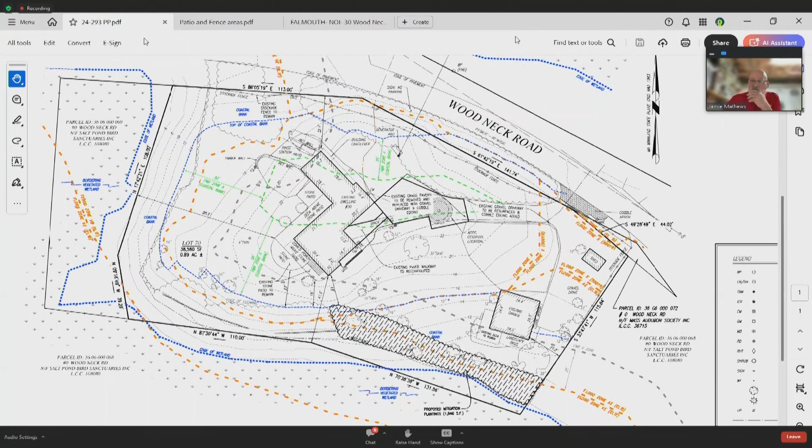I believe I've touched on all of staff's concerns, and hopefully we've addressed your concerns. So I'll stop sharing and address any questions you might have. Thanks, Tim. Sarah, do you have anything you'd like to add at this point?

Sorry, no, I'm fine to answer questions. I think Tim's comprehensive review shows how we'd like to resolve it. We did file this voluntarily in response to the enforcement order. The bulk of these were done just under 10 years ago, and we realize we need to address them, and hopefully the mitigation we're providing, which meets current regulations, will satisfy the board.

All right, thank you. Jim? Yes, Mr. Chairman. Tim, the portion of the fence in the V zone, that 49 linear feet, is that FEMA V zone or Falmouth V zone or both? That's FEMA V zone. What about our 25-foot offset? It would be approximately an additional 25 feet.

So, 74 linear feet, and the reason why I was kind of counting the 49 feet is because that's where the gate post is. So ideally, if we had to remove something, we'd like to remove it from that fence post to the gate down, because that's the actual portion of the stockade fence that's within the FEMA V zone.

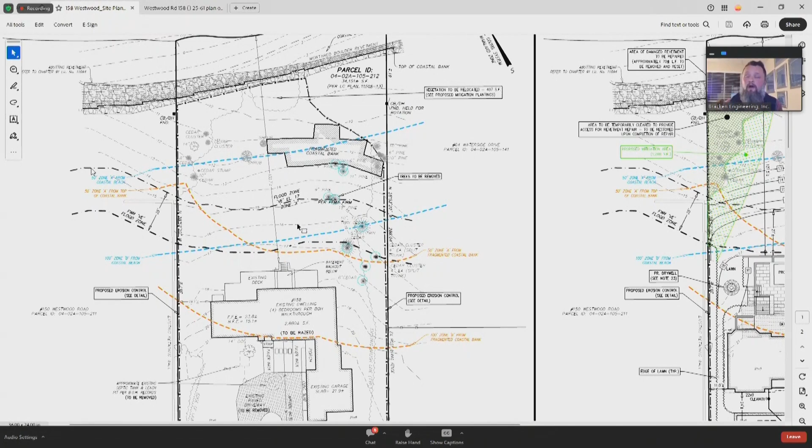Our project site is 158 Westwood Road, an existing developed single-family house lot created in 1961. There's an existing seawall on the northerly side of the property, approved through the Falmouth Commission back in 1976; it's a current mortared wall. Other resource areas on and near the lot are a coastal beach to the north, land subject to coastal storm flowage, and a VE flood zone, elevation 17, with the associated Falmouth 25-foot offset. The existing lot sits predominantly on the high side, around elevation 21 down to elevation 17.

The applicants are the new homeowners of the lot. They purchased this property over the summer and retained our office to work with them and the design team to redesign a new coastal resilient property. Initially they were looking to design a structure very similar to the house next door, more seaward on the property, with a seawall or retaining wall and elevating up the backyard. We've gone through the regulations with them, explained the coastal resiliency issues and current sea level rise in the area, and talked about pulling the house further back on the lot to create a more coastal resilient property.

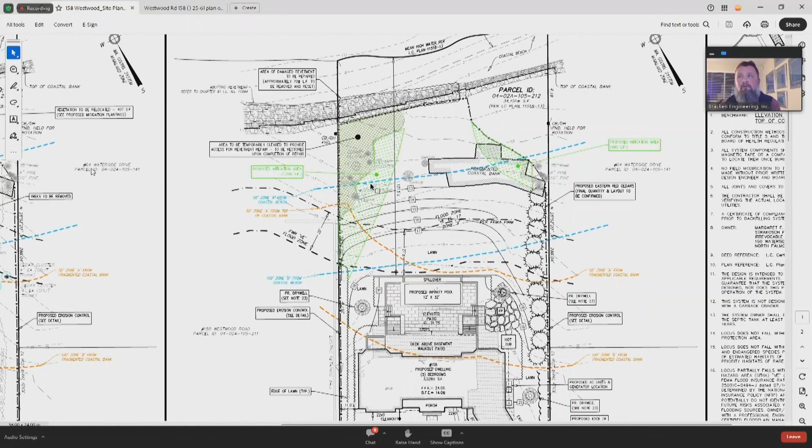So the proposed structure is actually moved leeward of the seawall and pulled further back onto the lot. All development from a structure standpoint has been designed outside of the 25-foot extension to the FEMA flood zone, with the septic system sited most leeward on the property. Most work within the conservation area is the construction of the elevated patio in the back. We're looking to regrade the back of the yard to make a more coastal resilient property and to change the effects of water deflected onto our property from the abutting seawall.

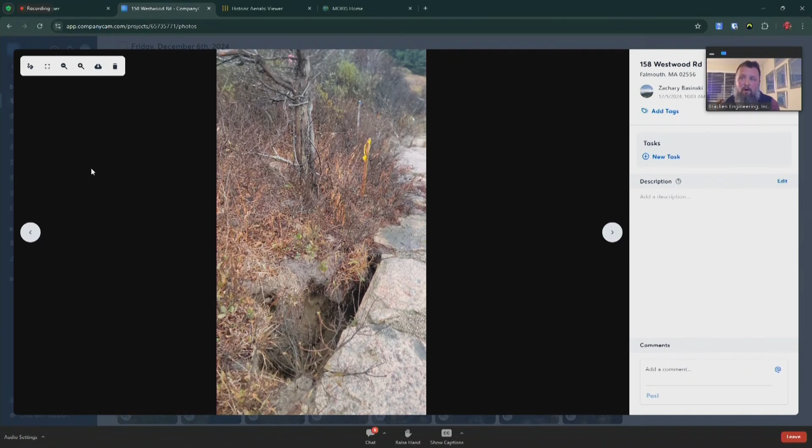As part of the overall project, we evaluated the existing mortared seawall and discovered during inspections that it's currently eroding on the back. Water running down through our property and the abutting properties hits the back of the seawall, causing sediment to erode. So we're looking to take this seawall apart as part of this application, rebuild it as a new open-face seawall maintaining the same 1.5-to-1 slope on the front, redesigning it with current technology using a riprap back so water can freely pass through, maintaining sediment on our property. We received staff reports about vegetation disturbance in this area. We plan to bring equipment through the house and down the backyard, dismantle the wall, use the area as staging, rebuild it with an open structure so water can move through freely, then revegetate and replant the property.

There was a staff comment regarding some additional trees in the backyard on the property. We're looking to remove that, because of the fill that we're bringing into the backyard to make this more coastal resilient. Also, because we're in the velocity zone, we're trying to provide a buffer to the existing house to the side of us, replanting that with eastern red cedars.

We know we can't plant any coastal fences within the existing velocity zone. So the native vegetation replanting of the trees off on the corners of the property line allows us the privacy that the homeowner is looking to create on the lot. It also allows us the ability to replant vegetation off on the side.

We're also asking to maintain this area open in the middle here, so in the future, if we have to get to the other side of the wall, we can repair that. And then we have equipment access around the structure and out through the back. All roof runoff would be contained with new dry wells on site to help mitigate the runoff.

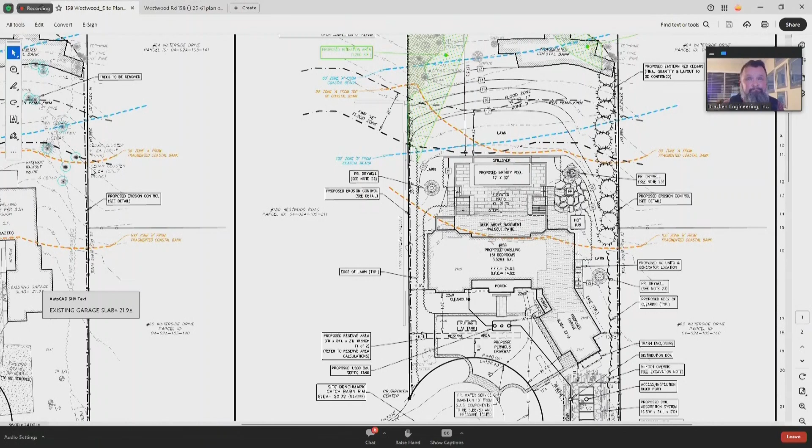I don't like the grading, Zach. I just don't. I don't think it's necessary. I think that we asked the question of why you're doing it, and we came up with coastal resiliency, everybody's new buzzword, but we're moving an infinity pool almost all the way, even closer than the existing structure is, even though it's outside of that V zone. I'm not quite sure how adding all of that is making the property more coastally resilient, especially removing all the cedars.

So I do have an issue with the removal of those existing trees, since, as the staff report noted, there are a number of trees that have come off this property. You're removing quite a bit of vegetation for the repair of that seawall, which it appears you're just going to be chasing those sinkholes all the way down. You don't really know where they are.

It's undermining from the top. Yeah, based it on the site inspection. So we're asking for that to be in the permit, because unfortunately with the mortar and taking it all apart, we have a feeling it's going to peel apart because we're seeing more sinkholes across the top of the wall. So you don't know, so you're just going to be kind of chasing it down, correct?

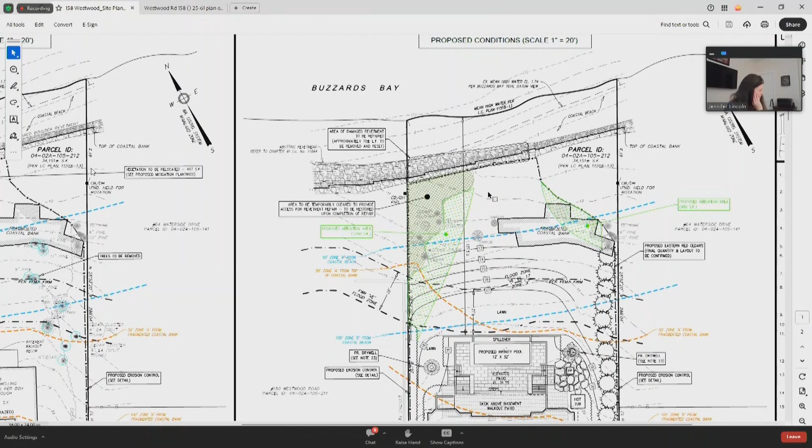So when the equipment's here, this is all going to be the staging area, then we'd restore all that back. Okay, perfect. Yeah, and then I'm just really concerned with the rest of those trees coming down, and would like to see them saved. That's all, Mr. Chairman.

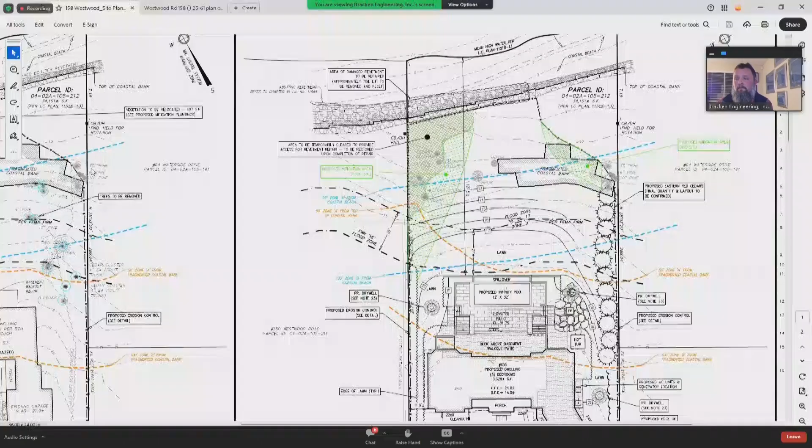So when we look at the abutting property, the undergrowth and putting the trees right along the lot line through there, and then the future access around the house to get down there. So the existing cedars currently don't have undergrowth underneath them. The intent here is to create a nice buffer between the sides, and these existing trees would prevent the new ones from growing.

So again, we're replacing the whole area with this. We're taking 10 trees out, replacing it with 11 back in place. And again, if we go back and look at when the lot was created, there were no trees in this area. They've grown up over the last 20 years.

So we're trying to balance the property, the requirements of the property owner, bringing back a buffer zone, and trying to balance between the two properties here and creating a buffer zone down on the other side that will be in harmony with the other neighbors, because we're going to replant with all native vegetation down low that will continue this habitat through this area and still create a coastal resilient structure on the property. So we're balancing a lot of different things on this property and managing it, and we feel we've met the performance standards with the regulations.

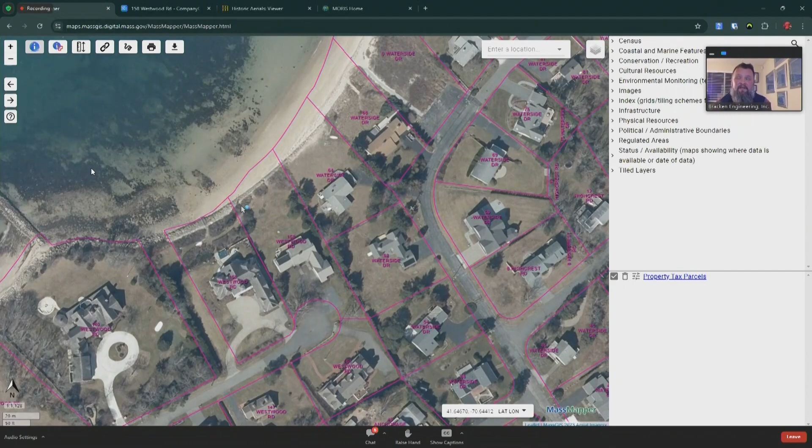Sure, and I realize based on the aerial photos there was nothing there then, but it is quite vegetated now. And there's already a line of trees, so why not plant shrubs if the understory's void instead of taking them down? Because there's been so much unpermitted tree removal, and now literally every tree is coming out of jurisdiction, except one close to the house and three little ones by the fragmented coastal bank. So replacing big trees with small trees doesn't make sense to me.

No, it's the future maintenance of getting around the structure, getting down to the seawall, maintaining the backyard, getting around the property. We could leave them now, but then there's going to be future maintenance and we'd be back in front of the commission at a later date to take those out. So we're just trying to design a property that we can create something that's best for the area, that we can maintain around, and that's in harmony with everything in this area.

And again, provide privacy to the neighbors so we're not infringing on the neighbors to the east with the project, and still build something that's coastal resilient. I know it's a buzzword with everything, but being a coastal flood zone manager, we're trying to design these projects that will be here after a storm event.

Yeah, and I won't keep harping on it, but there's a patio there now too, so you couldn't even get a vehicle back there if you wanted to, if you want to put a patio on a bunch of trees. But yeah, no, I'll digress, we cross over the patio and come around the side. Near the hot tub? Yeah, around the back side of the hot tub too.

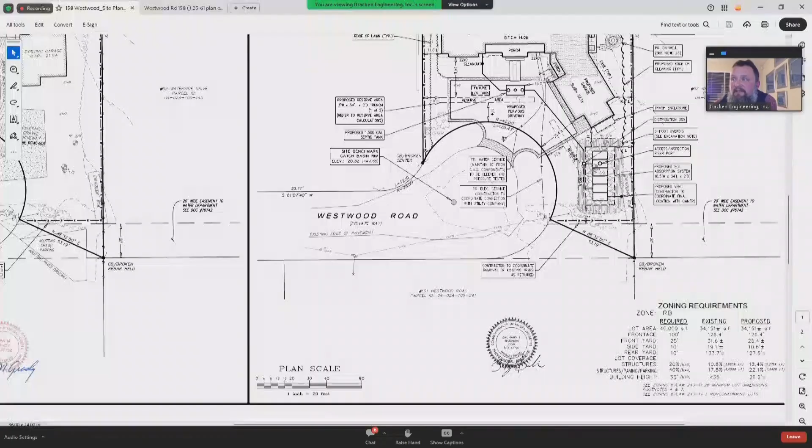And I didn't see the seawall plan, but are you going to do what is often done now when seawalls are rebuilt, to put filter cloth behind? Yes. Is that how you're going to do it? Yes, we have it on the second sheet here with the detail. So the filter cloth, the riprap stone behind it, rebuild it with a toe stone, but keep it open faced. Yeah, but I agree, if you're going to do it, just get it all done now.

Can you see this plan? There's your septic down below. I just have a blank sheet up top. Yeah, Zach, I don't think we have the same page 2 that you just showed. We're not picking on you, it's just not here. Well, that'll explain the confusion. I apologize for that.

Just so you know where we're coming from, my last comment, in addition to no grading and vegetated buffer, those are 2 main points, is that there were no trees on the Cape 100 years ago when it was all grazing land. But our goal, if we want a resilient coast, is to have more vegetated buffer protecting the seaward resources from runoff from the land and protecting whatever's built from storm damage. That's all I have.

Thank you, Courtney. To follow Betsy, you're right, 100 years ago there wasn't much native vegetation and trees, but if you go back to the 1600s, this was all old growth forest on the Cape, and they used it for ship masts and stuff. Anyway, I have some other comments.

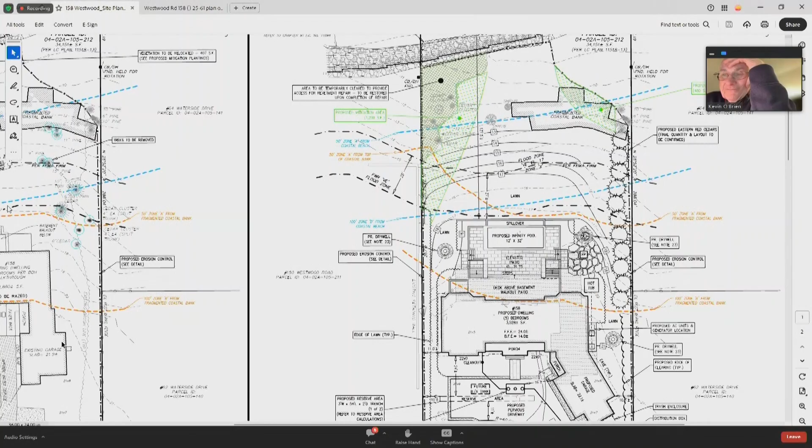There's equipment, just like any other swimming pool. Yeah, I understand, but the installation of these things is a little trickier than a pool. That's what I'm saying, and that's why I'd like to see it. They don't have to continue it for it, I just want to see more detail. Other than that, I have no other questions.